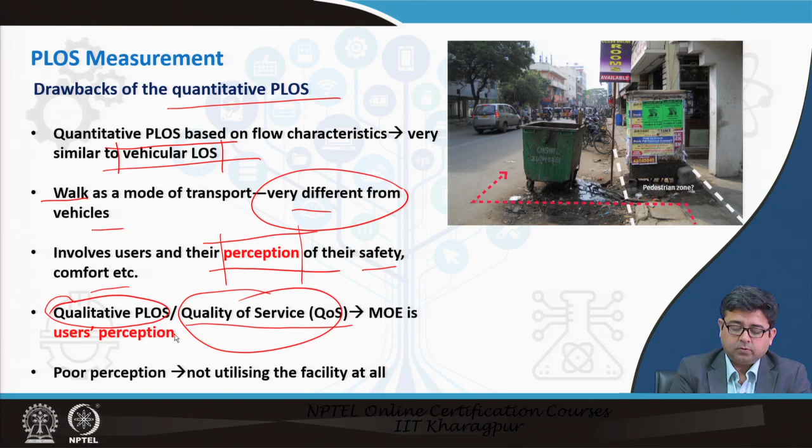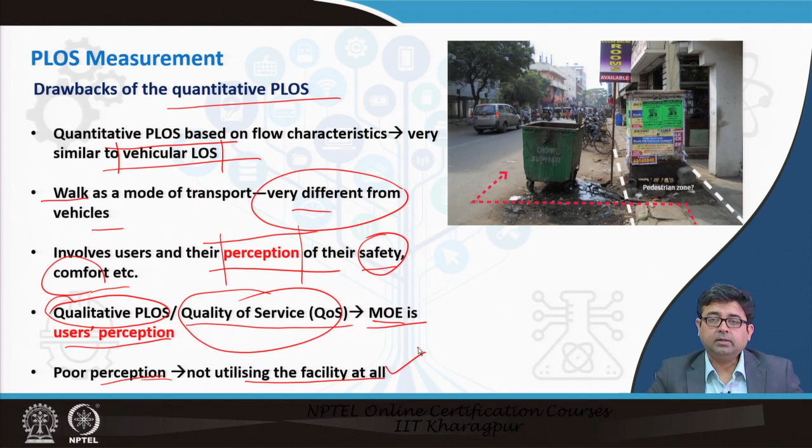Hence the terminology was coined which is known as quality of service rather than level of service. Qualitative pedestrian level of service started to be called quality of service, and the measure of effectiveness is users' perception. If people perceive that the facility is not good, they will not use it, even though it may be engineered in a very good way, or even though the flow, the speed and the densities are all indicating that this is good for pedestrians. If they perceive it is not a good facility in terms of safety and comfort, then the usage of that facility will be very little. So, we will see how all this can be calculated exactly.

Usually the way in which we capture the perception of people is on a Likert type scale, where you ask people on such a scale. For example, a question may be asked: how much do you like the footpaths in your neighborhood? This may be a hypothetical question asked to you as a user, as a pedestrian, and you would be asked to give your rating or ranking of all these footpaths in your neighborhood. So, how much do you like?

You may say that I strongly agree that all of the footpaths are good, or the question should be: to what extent do you agree that the footpaths in your neighborhood are serving the purpose? If that is the question, then you would say you strongly agree that they are serving the purpose. That means you perceive that it is very good, or you say that I strongly disagree, or anything in between. So, there can be variations in the scale.

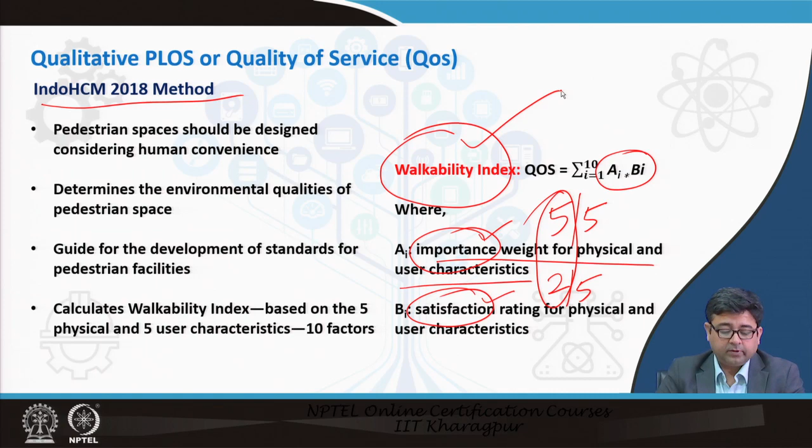Then you would say, well, it is very important, but I am not at all satisfied, so I am only giving a 2. So, on importance you give a 5 out of 5, whereas on satisfaction you only give a 2 out of 5. All you do is a weighted average of these two, and you keep asking this for all the users or a sample of the users in your neighborhood to get what you call a walkability index score. I just gave you an example of one question, but this could be done for different questions as well.

Eventually, after you get all of those weighted averages, you can then use this table, and all the scales were empirically developed, to determine what quality of service your pedestrian facilities are providing. So, if your score is greater than 124, you are at a very good quality of service, whereas if it is less than 52, you are at a poor quality of service.

The next thing to remember is to actually define each of those physical and user characteristics. So, the physical characteristics have been defined using 5 different parameters.

One is footpath surface, one is footpath width, one is obstructions, next is potential for vehicular conflict, and the other is continuity, right. So, if they are standardized and if they are defined, then you can ask the same question to everybody without worrying about the fact that, because of the variability in the way you are asking questions, people may answer it differently.

So, there is always a problem when you are collecting perception data if you have not defined the questionnaire properly. People may give you different answers based on the way you ask the questions. So, you have to frame the questions, you have to define the questions very properly. So, when you say footpath surface, you have to say that a smooth surface without any cracks or bumps for comfortable walking is a very good surface, right. That is rated as the highest surface, and then you can have different levels for footpath surface.

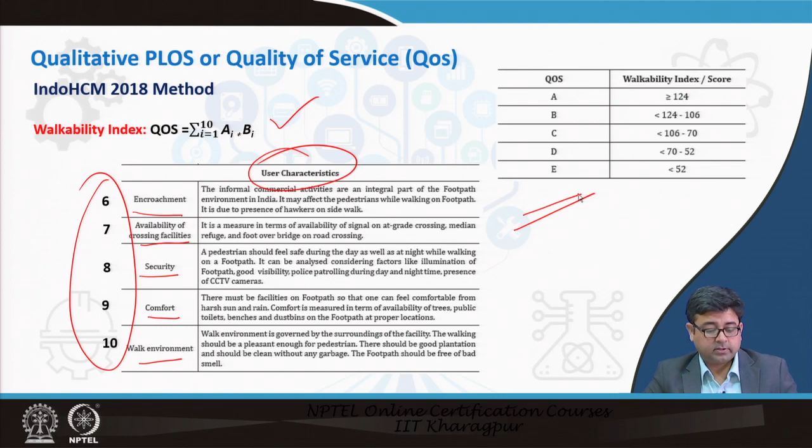Again, these are importance score 5-point scales and satisfaction score 5-point scales, right. Remember, for each question you will be asked 2 different subsets of questions. How important is it and how satisfied are you with the current situation? Based on this, you can then measure the quality of service.

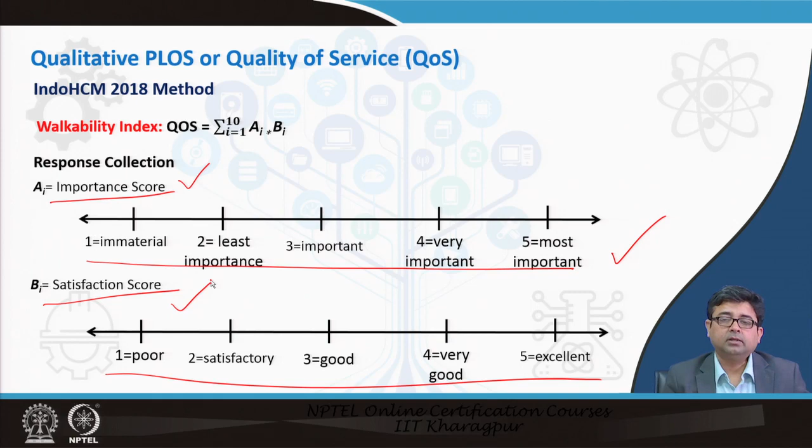Like I just said, let us go back. So, once you have defined footpath surface as a smooth surface without any crack for comfortable walking, then that kind of qualitative definition has to be broken down into 5 different levels, right. So, the excellent level will be even surface with no cracks or bumps and tactile flooring, whereas poor would be no raised footpath at all. Satisfactory would be bad condition, lots of bumps and cracks, whereas good would be moderate quality with few bumps and cracks. So, remember, these are qualitative aspects. We are looking at quality of service.

So, when you ask somebody about their perception, if you start asking numbers, then they may not be able to give you a right answer that will help you understand the perception of the viewer. So, when you are asking somebody to rate how good the footpath surface is, yes, you have to divide them up into these 5 distinctly, but you also have to have a very reasonable or qualitative way of asking the person what you want to know.

For example, when you are asking a person how good a footpath surface is, and say is it of reasonable quality, is walking comfortable, they may be able to relate: yes, I do not have any difficulty in walking, so maybe I will rate it very good. Or if you say, was there not any footpath at all, and they say no, there is no footpath at all, then there is no question of a footpath surface, so you would rate it as poor, right. So, this is how you have to come up with scales for different parameters.

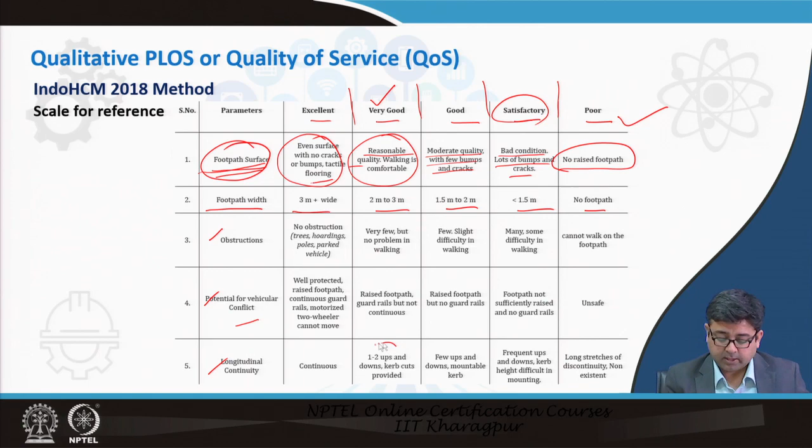Width, you can have a quantitative scale and you can actually measure it, you do not have to qualitatively ask anybody. Obstructions, again has to be a qualitative scale. Potential for vehicular conflict, qualitative. Continuity, some kind of qualitative and quantitative mixed. So, once you know all of this, and user characteristics are similarly defined on different scales, you can then go about and collect the data.

So, let us give you an example of how we have used it in Indo-HCM. Say a footpath of width 2 meters in a residential area is to be redesigned and improved by giving importance to the perception of pedestrians in terms of satisfaction and their importance on various qualitative footpath attributes, right.

So, a footpath was already laid, but when it was laid, users' perception was not taken into account. So, now they want to redesign it taking users' perception into account. So, the following are the mean importance and satisfaction ratings from 200 respondents accordingly.

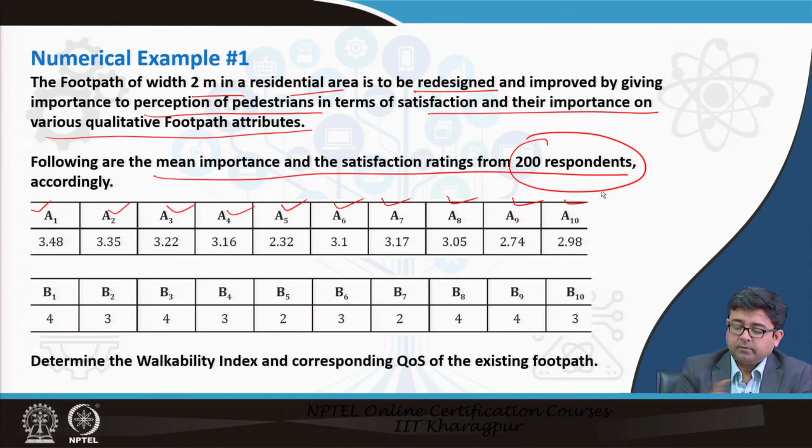So, what they found out was all these A1 to A10 are the questions that we have already introduced you to, and the mean ratings have been found out to be these. I believe these are importance ratings and these are satisfaction ratings, right.

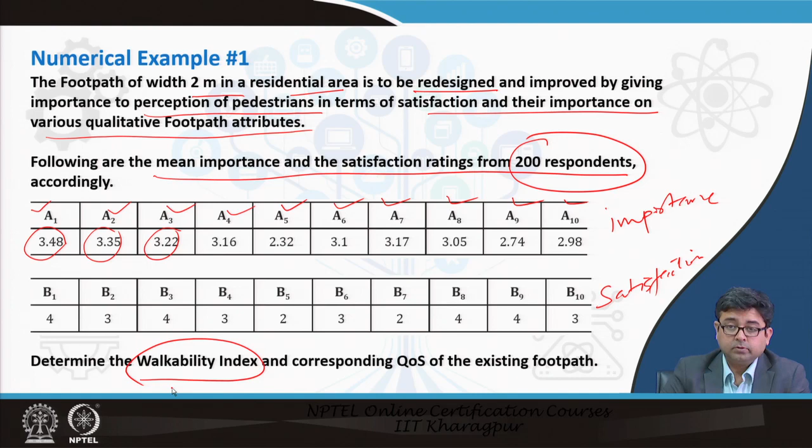So, once you know that, if you are asked to calculate the walkability index and corresponding quality of service, all you do is multiply each of the pairs, add them up and you come to a walkability index of 98.71 or 99, 98.799, and you look up the table and you say that the quality of service being offered by the sidewalk currently is a C quality of service, right.

So, then you can always do a post analysis. Now, if an improvement is done and you do another survey after the improvement has taken place, you would expect that if all the users' perceptions have been taken into account, this C would at least improve to B if not to A. So, that is how you can quantitatively or qualitatively measure that users' perspective has been taken into account while improving a pedestrian facility.

Now, of course, there are a lot of drawbacks when you are looking at only qualitative stuff. Based on users' perception, it captures users' response comprehensively. People do agree that if you only look at quantitative aspects and do not take people's perspective, it will not comprehensively look at the scenario. However, if qualitative analysis is the only source, then it may be prone to inaccuracy, reasons being people are not always answering the questions in a proper manner. Maybe they are impatient, maybe they just want to get over with it.

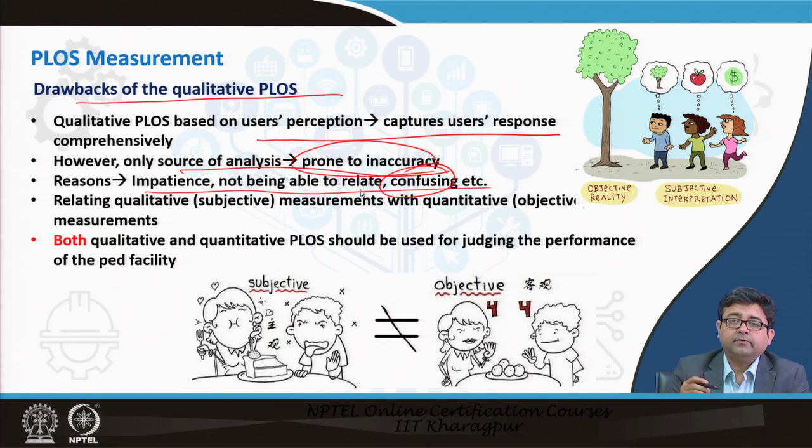We have a tendency, if you are asked to rate anything from 1 to 5, to stick to the center, right. We always try to tick 3 on a 1 to 5 scale most of the time. So, you are not able to get a proper answer, maybe the questions are confusing. If the questions are confusing, then you get different answers from different people. Then again, relating this qualitative measurement with quantitative measurements is difficult. So, if you do not quantify them properly into different levels, then it becomes a problem.

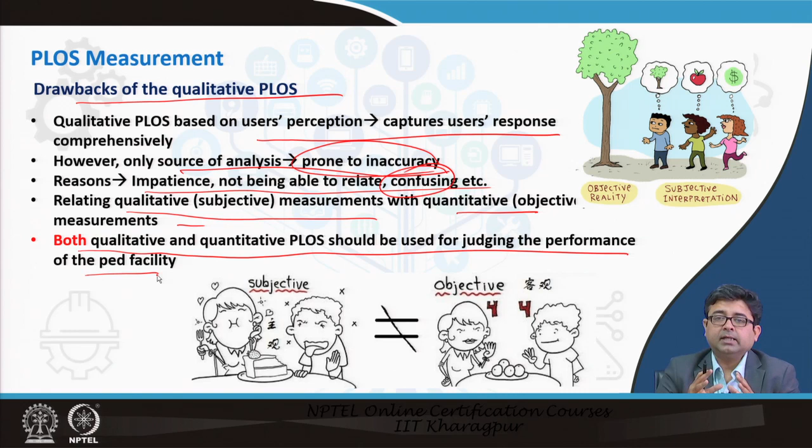Hence, it is suggested that both qualitative and quantitative PLOS should be used for pedestrian facilities. So, whenever you are judging the performance of a pedestrian facility, you have a quantitative measure and also a qualitative measure. Do not just go with the qualitative measure or just the quantitative measure, combine both of them and then take a call based on the existing conditions, right.

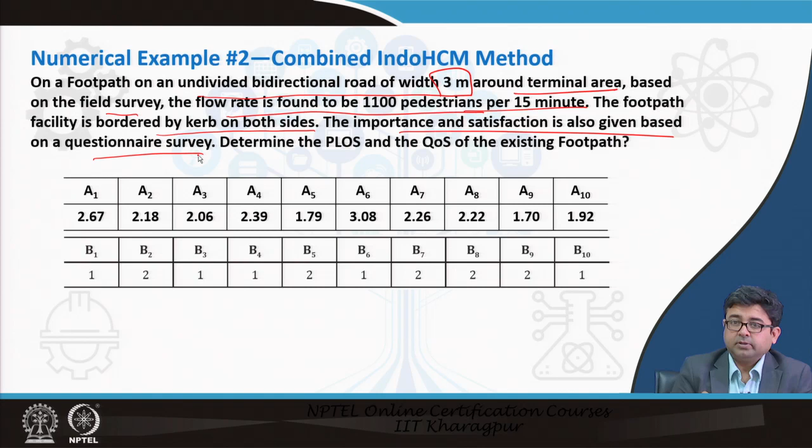So, looking at a next example, on a footpath on an undivided bidirectional road with width 3 meter around a terminal area, based on a field survey, the flow rate is found to be 1100 pedestrians per 15 minutes. The footpath facility is bordered by kerb on both sides, and the importance and satisfaction is given based on a questionnaire survey that was done. So, determine the PLOS and QoS of the existing footpath, right.

So, QoS would be the qualitative one, whereas PLOS would be the quantitative one, based on the flow parameters, which we have already explained in the previous lecture, how to determine the quantitative level of service or PLOS, and we have already looked at QoS. So, let us see if you combine these two, do you get the same or similar answers or not, all right. So, let us start.

So, in determining the quantitative PLOS, you remember you had to follow 6 steps, which were already shown to you in the previous lecture. You identify the sidewalk based on land use. So, here your land use is a terminal land use. You get a measurement of the sidewalk width. You know already the sidewalk is 3 meter wide, terminal land use.

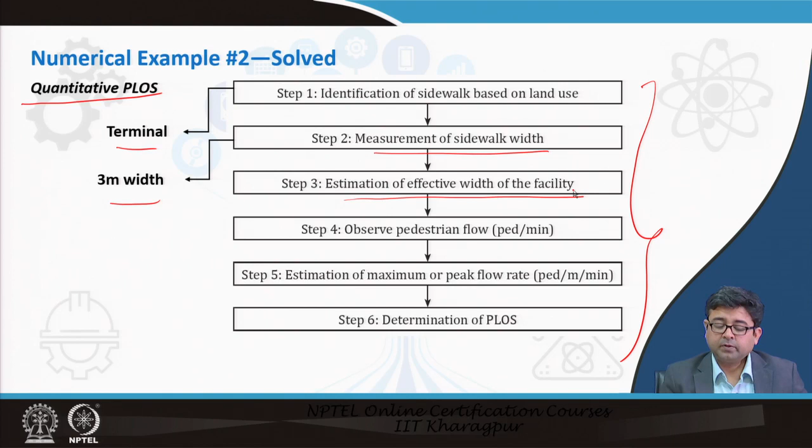You estimate the effective width of the facility. Remember, how do you determine the effective width? From the actual width, you subtract the different types of obstacles that are there, and each of these obstacles have a certain shy distance associated with it. So, here, since it says that it is bound by kerb on both sides, the shy distance is anywhere between 0.2 to 0.4, and if you just take an average value of 0.3 on both sides and subtract it from the total width, you say that the effective width is 2.4 meter.

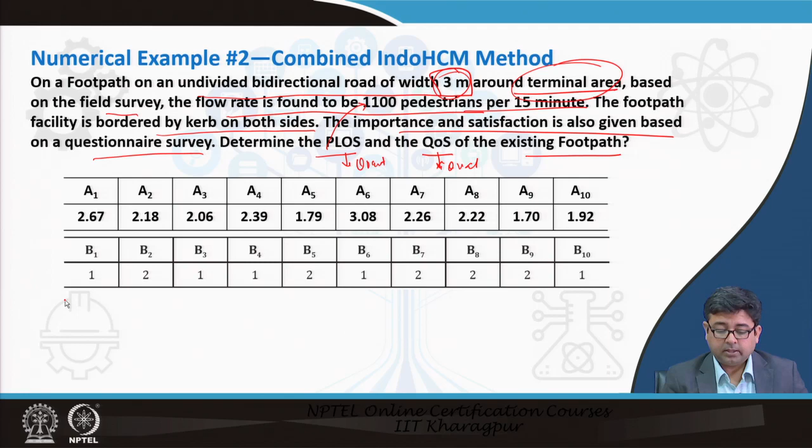Then you observe the pedestrian flow. You are already given that the pedestrian flow is 1100 for 15 minutes. So, per minute your pedestrian flow is that. You need to then estimate the peak flow rate. Peak flow rate is nothing but you divide it by 2.4 and you will get your peak flow rate, because 2.4 is the effective width. Remember, peak flow rate is pedestrian per meter per minute. So, this is for 2.4 meters. If you want it per meter, divide by that. So, this is your flow rate.

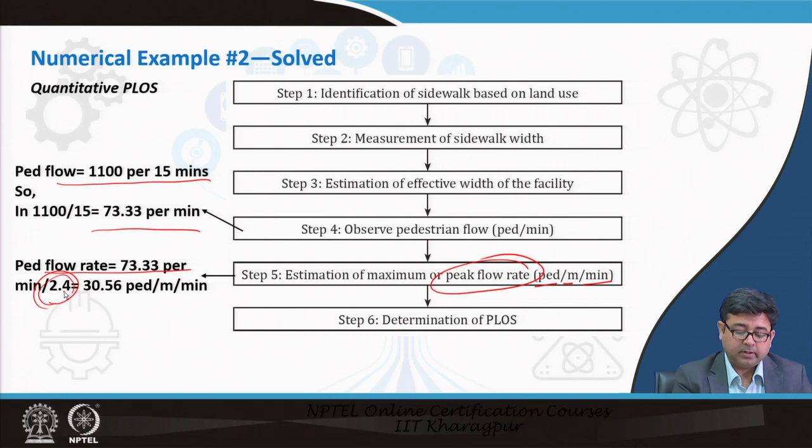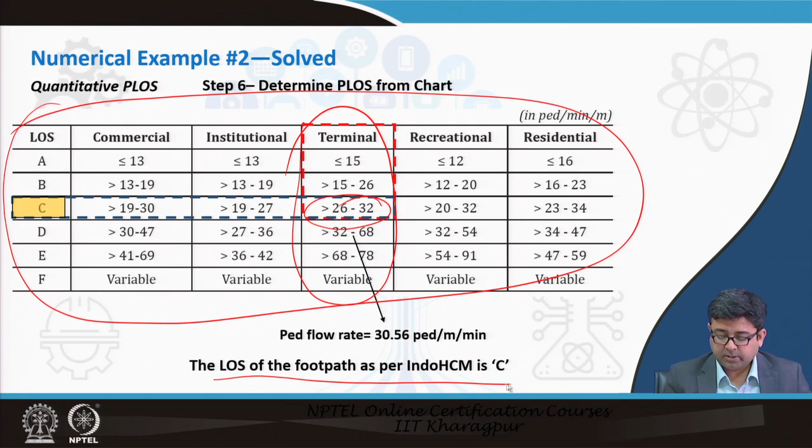Now, you know your flow rate, and remember this chart that gives you the quantitative PLOS for each of the land uses. Now, you know that the land use is a terminal land use and your flow rate falls between this. So, as per the Indo HCM, your level of service is C. So, now you know that the quantitative level of service based on the flow rate and the effective width is level of service C.

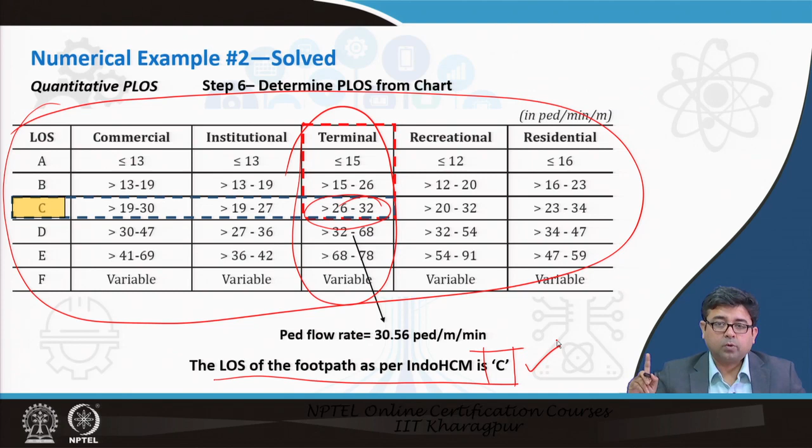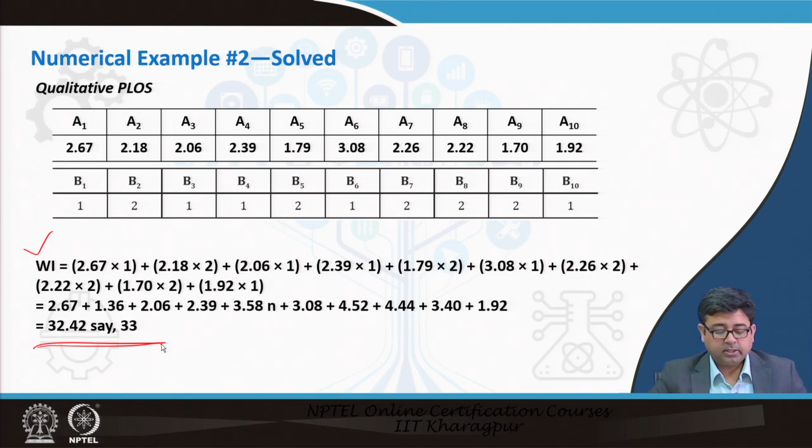At the same time, you have already done a questionnaire survey and you have gotten the importance and satisfaction scores to determine the QoS, quality of service. So, you have all of these individual scores. Again, you develop a walkability index WI and you get it as 32.42 or 33. Based on 33, you know the table and you see that it is less than 52. So, now you see that the quality of service provided by the footpath that you have is E.

So, here you have two conflicting answers, right. When it comes to a quantitative pedestrian level of service, you are getting a C, whereas for the qualitative quality of service, it is coming out to be E. So, if you had only developed this using engineering principles, then you would have thought that, well, C is the optimal level of service to have, so the footpath is perfect.

However, since you had already done a qualitative survey, you can now assess that this sort of a pedestrian footpath will be detested by users, right. So, by doing that, you can understand that something has to be changed, something has to be improved in order for it to be liked by all users. Therefore, interventions that will help improve the quality of service have to be carried out, so that you get a balance between the quantitative level of service and the qualitative level of service.